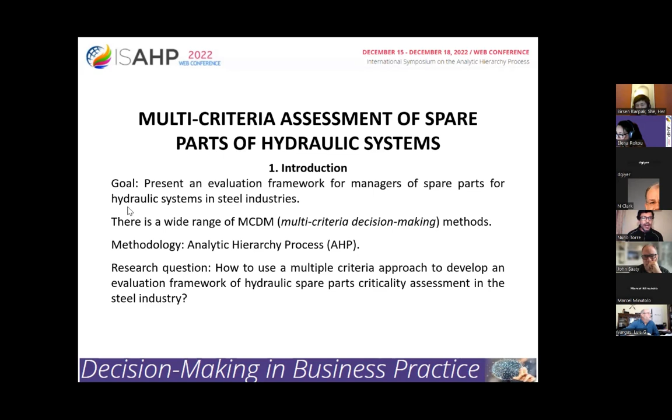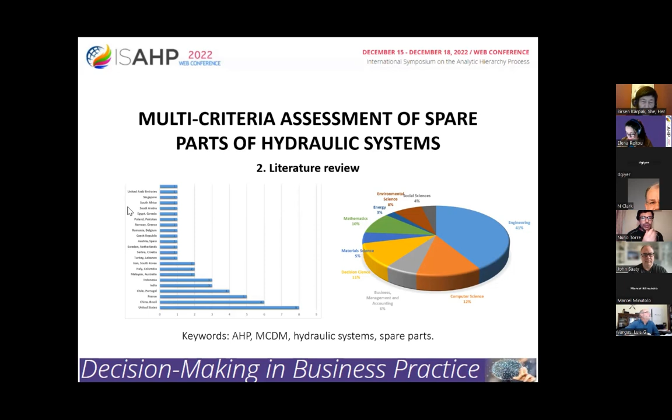In the figure on the left, we have the country distribution, where the United States is in first place with 8 items, and in second place, China and Brazil tied with 6 items. In the picture on the right, we have the research area, where engineering got 41%, so it is the most frequent topic for this research. In second place, we have computer science. In third place, business, management and accounting. So from the 263 articles, we chose only 50 to develop this research.

About the criticality of spare parts. Criticality is one of the most used criteria. The spare parts criticality assessment shall be based on the logistics and maintenance requirements. This was cited by Antosz and Ratnayake in 2019. Hydraulic systems performance demands a high level of availability, which can be reached by appropriate measures. This was cited by Pavlov, Polyanin, and Kozlov in 2018. And the steel industry is seeking to introduce new management concepts with wiser insights to warranty the quality of their products. So organizations need to choose their partners and establish strategies that optimize their results, according to Deshmukh and Vasudevan 2018 and Ulutas 2019.

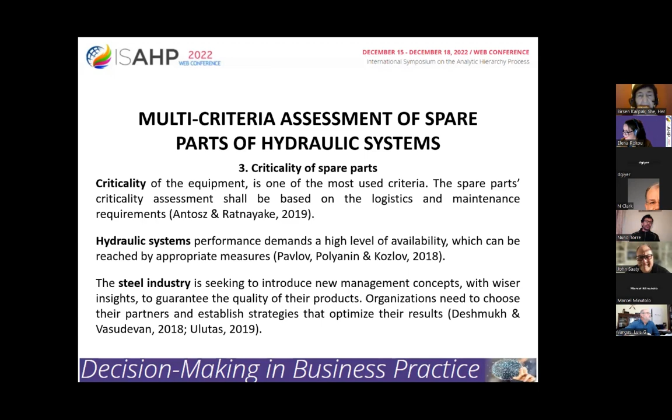So as I referred before, I'm working in the large plant of a Brazilian industrial group that operates in the steel market. We have more than 10,000 employees in this organization, and we operate large-scale equipment such as hot strip mills, cold strip mills, blast furnace, sintering process, among others.

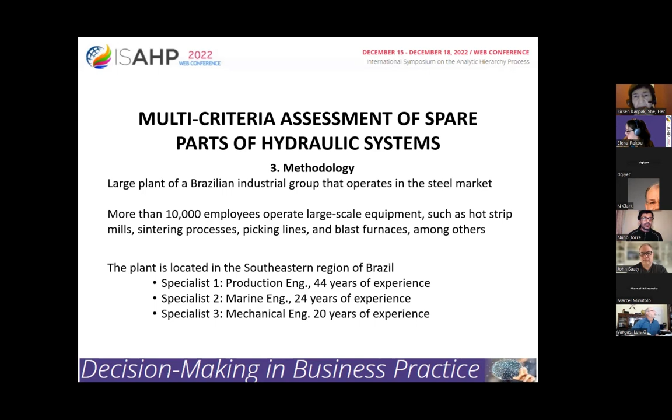And we chose 3 experts for the interviews, questionnaires, and also making the judgments. The 3 experts are from the engineering department and also from the maintenance department of the production area that we chose. Specialist 1 is a production engineer with 44 years of experience. Specialist 2 is a marine engineer with 24 years of experience. And specialist 3 is a mechanical engineer with 20 years of experience.

About the methodology, the analytic hierarchy process, AHP, is a method of multi-criteria decision-making, MCDM, with great efficiency and flexibility. It was cited by Saaty and Vargas in 2001. Our research had 6 steps. The first step is to structure the decision problem into a hierarchy, choosing criteria, sub-criteria, and assigning ratings. All the criteria and sub-criteria we picked from the literature review, and a group of experts decided which ones to choose.

The second step is the comparison of criteria and sub-criteria by K experts. In step number 3, the aggregated comparison matrices A are obtained by aggregating individual judgments, AIJ, priority vectors W were obtained, and the consistency ratio should be less than 0.1. Otherwise, the experts need to make all the judgments again, okay?

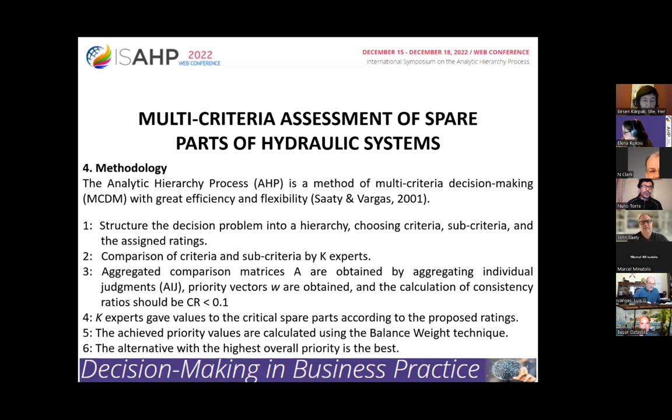In step number 4, K experts gave values to the critical spare parts according to the proposed ratings. In step number 5, the achieved priority values are calculated using the balance weights technique. And finally, in step number 6, the alternative with the highest overall priority will be the best alternative.

with the criteria. Concerning the criticality of equipment, we have 3 items: life cycle, failure predictability, and repairability. Concerning logistics, we have the price, the lead time, and the suppliers. And concerning maintenance, we have the maintenance policy, the frequency of use, and the employees' qualification. And finally, we have the ratings. For the ratings, we chose the technique ABC or VED, okay?

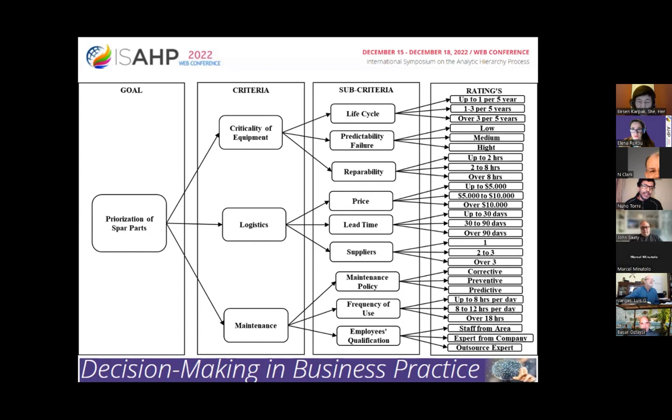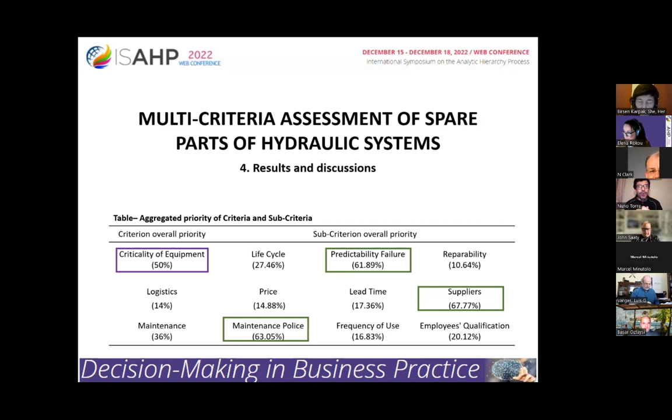About the results and discussion. Here in this table, we have the aggregated priority of criteria and sub-criteria. For the criterion overall priority, in first place is the criticality of equipment, with about 50%. For the sub-criteria concerning criticality of equipment, failure predictability is highest with 61.89%. For logistics, suppliers is the most important sub-criterion with 67.77%. And concerning maintenance, we have the maintenance policy with about 63.05%. So here we can see the most important criteria and sub-criteria considering the hierarchical tree.

with each spare part. So now I will be giving 2 minutes like I did with Deepa. So you should finish in 2 minutes. Okay, I'm finishing. Perfect.

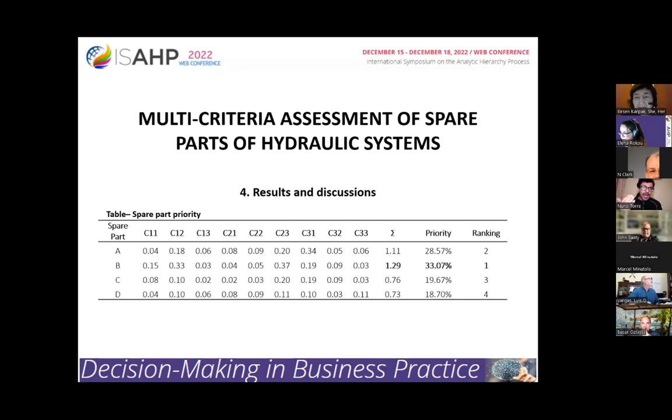This is my last slide. So ordering the hydraulic spare parts, we have spare part B in first place, then spare part A, and practically tied, we have spare parts C and D with only a difference of 0.97.

So through the framework that we proposed and the simple methodology of AHP, it's easy to identify the most relevant criteria and sub-criteria. So this hierarchical tree is a very useful tool for helping maintenance managers with assertive decision making. And fuzzy AHP or other decision methods, such as multi-attribute utility theory, can be applied to confirm the achieved values.

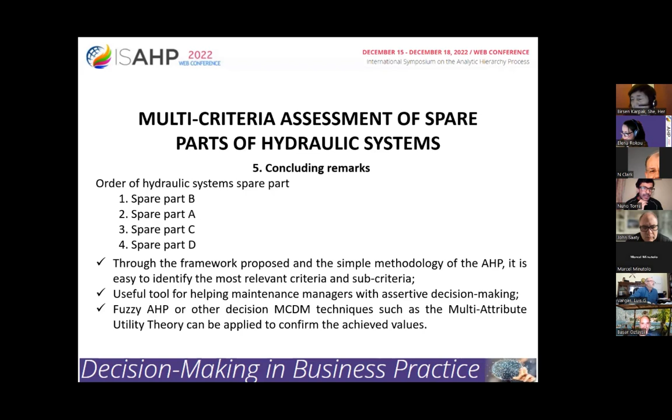Thank you very much. Anybody have any questions? Nuno? I have some comments. I really enjoyed the paper. I come from the petrochemical industry, and certainly safe, reliable, and competitive operations are important to that. I didn't recognize safety or operability in your criteria, so maybe that's in another area.

The other consideration to use on spare parts is network reliability analysis, looking at the system versus the reliability of each component and how that ties together. And there are tools out there to look at that. So if a pump is 0.9 reliability and another component is 0.9, you get 0.81 for the system. And so how does that fit in together?

But I really like the AHP in tandem with some of these other things. I think you're onto something there, right? How to get expert opinion and how to get some really excellent data into that. So congratulations on that, and thank you. Thanks a lot, Professor.

I have one suggestion. John, sorry, could I say something? Yeah. I have one suggestion. Although you have used AHP, you can still do analysis because each alternative might have different strengths. So based on each alternative, what are the strengths of the alternative? If you do this analysis as well, it will be somewhat of an ANP approach. And I would be quite curious what the results will be.